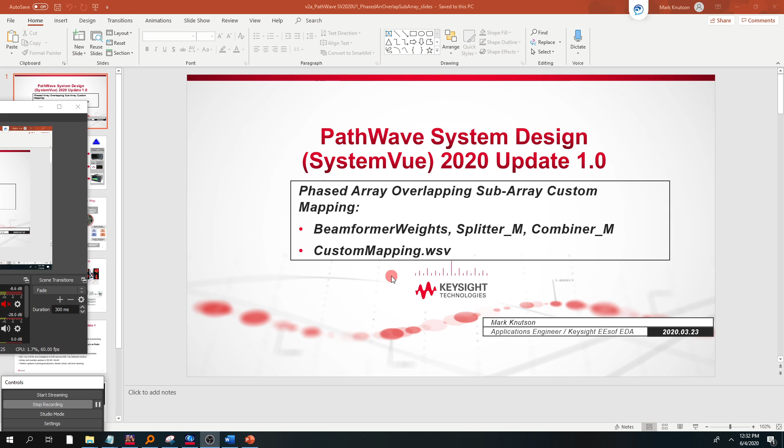This time, and this is what it looked like, I made some modifications, and I'm going to provide that example. It's called MK2 custom mapping. So let's take a look at that.

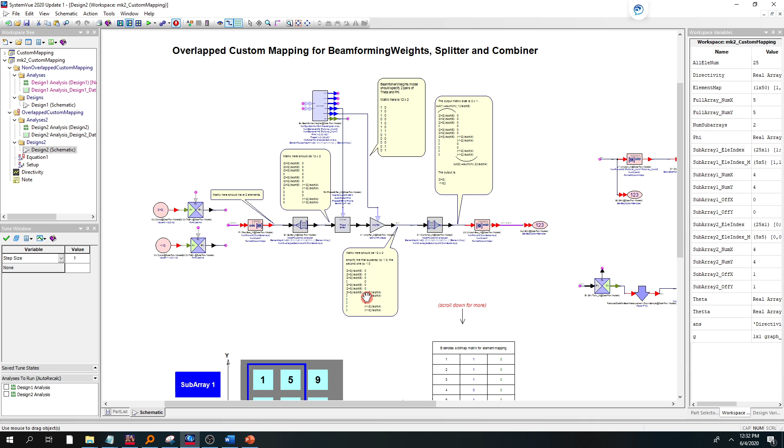So it's basically the same design, but let me show you what's different. Number one, the stock example was two subarrays that were 4x3 subarrays, set in the setup equation. I commented that out and refashioned them to be two 5x5 subarrays.

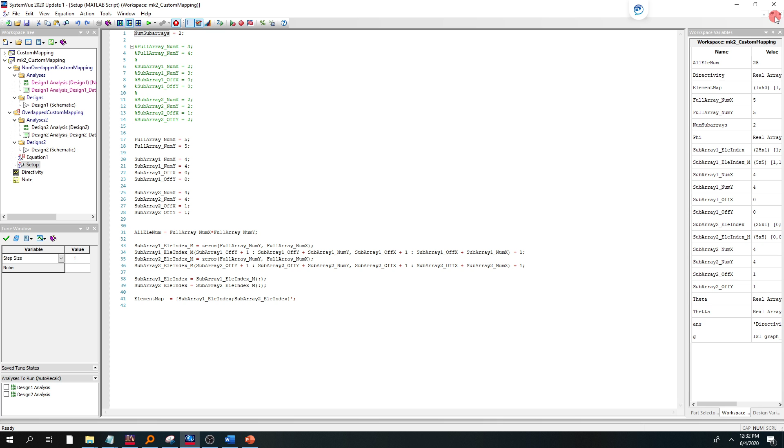We still build the element map the same way. I just changed from two 4x3s to two 5x5s. So the methodology of how that's put together visually is still the same, but instead of two 1x12s, we're going to get two 1x25 structures. So the resulting map will end up being a 1x50, as you see here, element map 1x50. And so that's a change.

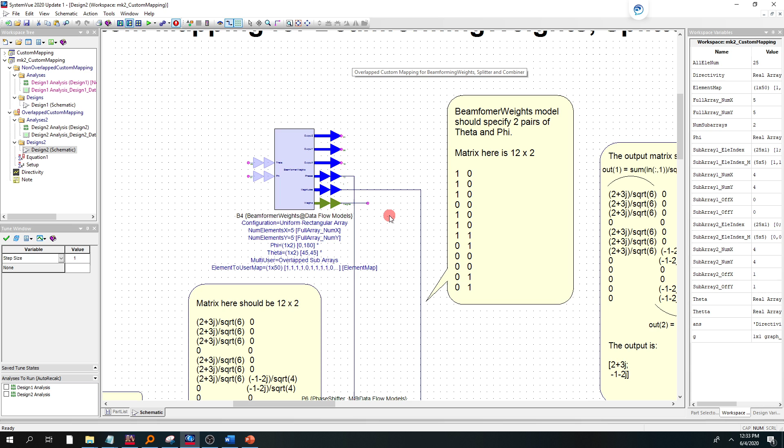The other change is I did add a phase shifter in here. I didn't have that before because I want to compare the beam directly from, again, the far field beam projected from the beamformer weights. I added a node there called weights, and you could do that on any node.

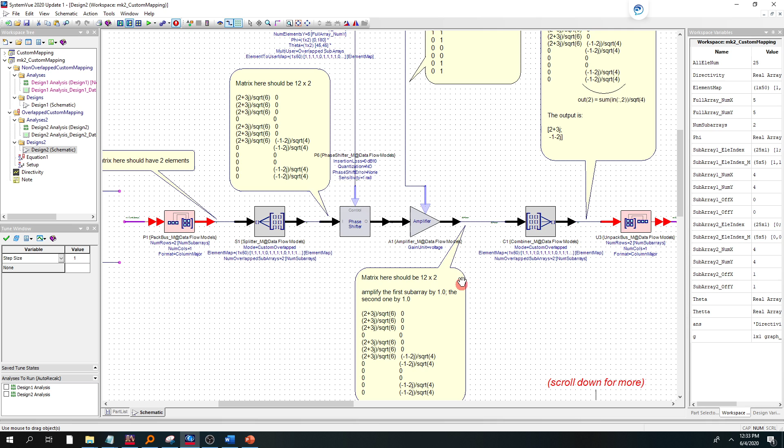You can right click and say edit net name, and you can add a node name, or you can make that a bus - I'll show you a bus in a little bit. So I added a weights node there, and I'm also going to look at the far field beam after the amplitude tapering is done, in our actual phase array design, with a node called 3D beam pattern.

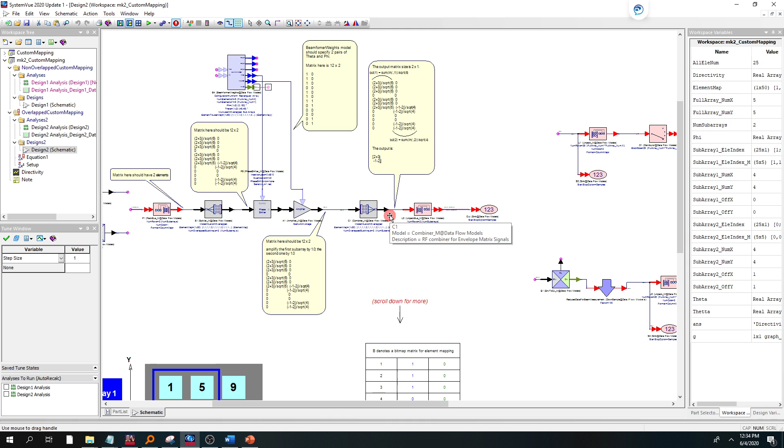So that's a change. I did change the direction. If I go to the beamformer weights, if I go to the beam configuration, I did change the directions for user 1 or user 2. So now I'm going for user 1, 45 degree theta, 0 phi, and user 2 is 45 degree theta, 180.

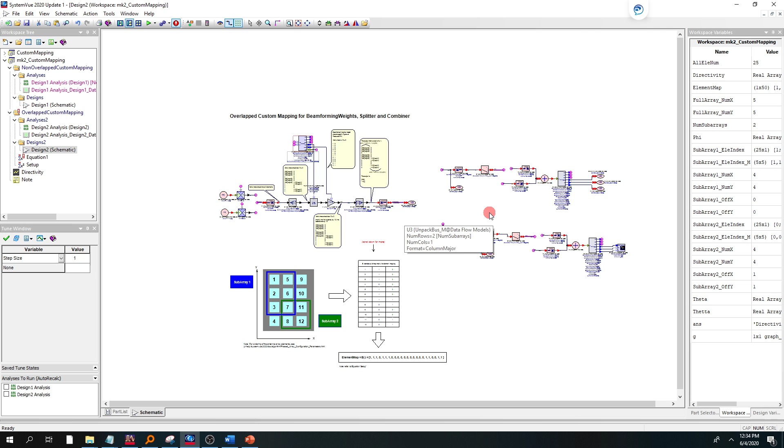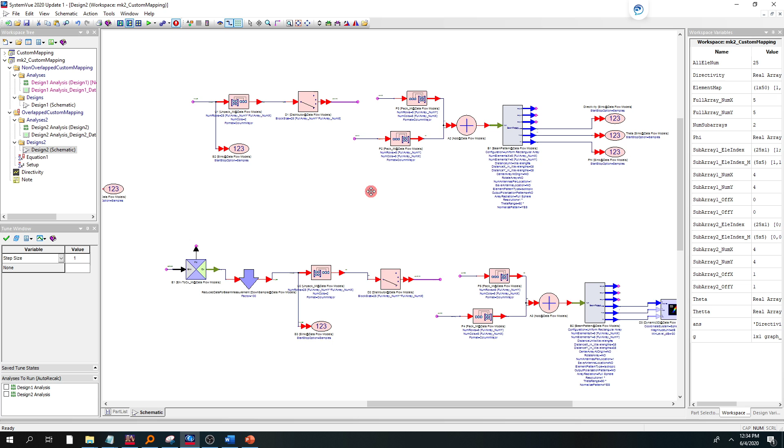So that's a change. And then to project the far field beam at those two different points, right off the beamformer weights - kind of the ideal beam that's tied electrically to the weights node - I have that on the top. On the bottom, it's basically the same thing, but I'm getting it from the 3D pattern, right from our beamformer phase array transmitter design, right after the amplifier part. So what does that give me? Let's first talk about what's common.

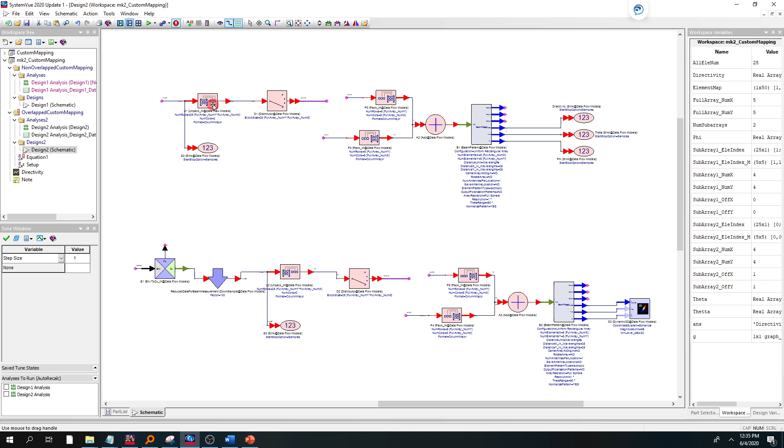There are a few differences between the two, and I'll talk about that in a sec. But what's common? On the MK2 Custom Mapping Design 2 version, I basically take the signal coming in, and I unpack it. In this case, it's two 5x5 arrays.

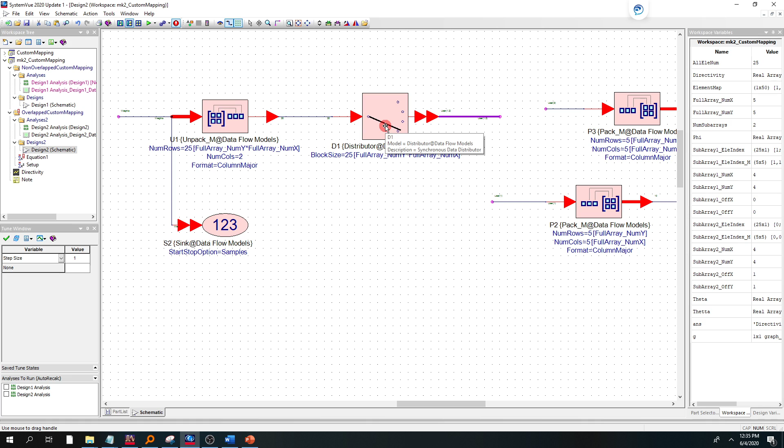So I basically unpack it in rows of 25 in column major fashion. I break it into two parts, back into the two subarray columns, and then I break that matrix into a string that I can distribute. I distribute in blocks of 25, since each block size of 25 is like a subarray because it's a 5x5 array.

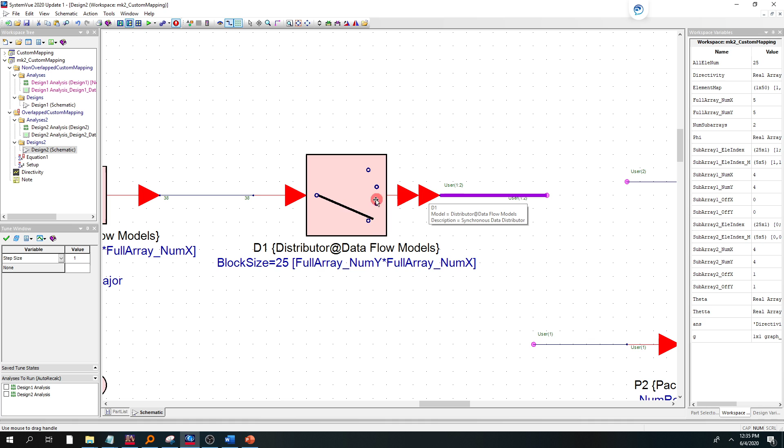So I declared a bus here. I used an unpack, and then a distributor, and at the output of the distributor it goes through two blocks of 25, distributing those out in a bus. First it goes to user 1, then after it gets through subarray 1's 25 blocks, it goes to user 2 and does subarray 2's 25 blocks.

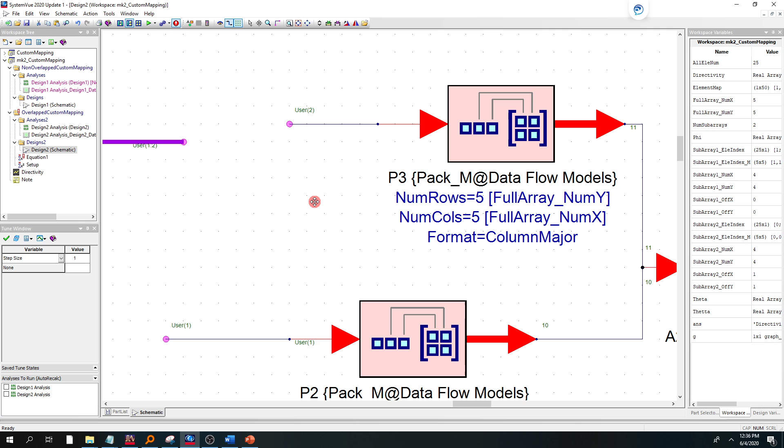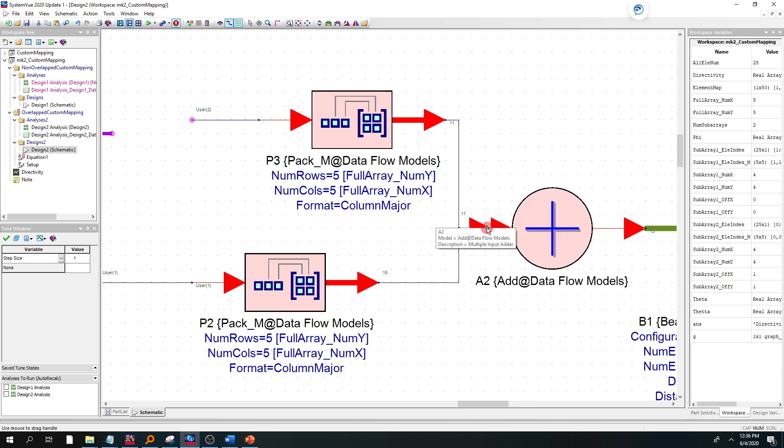And so then I use a pack matrix block. Before I used unpack, now I'm using pack to reconstitute those 5x5 matrices. And then I add them back together and put them in the beamformer part, the beam pattern part, that's going to project the far field beam. I'll show you that in a sec.

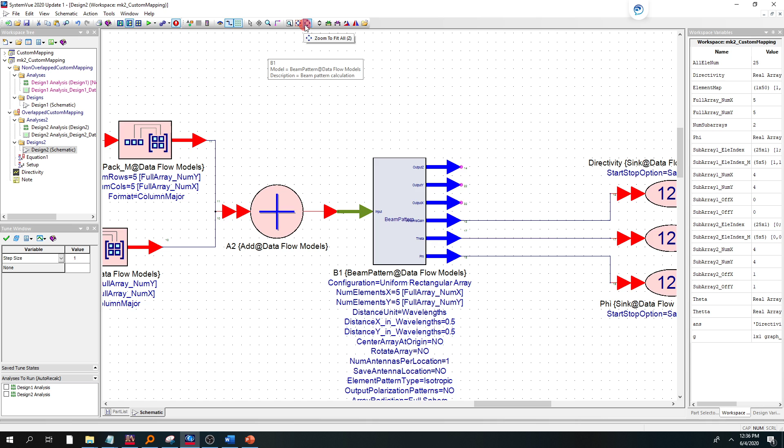So you might be asking yourself, why in the world would you unpack, distribute, repack, and then add it back together to get the same thing? Well, I could have just done the beam pattern right off of that point and gotten the results. Yes, I could.

The reason I did this is to show you the ability to turn on and off a different subarray and see the effect. This is the what-if power of a system design tool like SystemVue. So I'm going to basically show that.

These parts that I just walked through here are also in the other design where I'm picking off the actual 3D pattern node, and those are all the same. But what's different between these two?

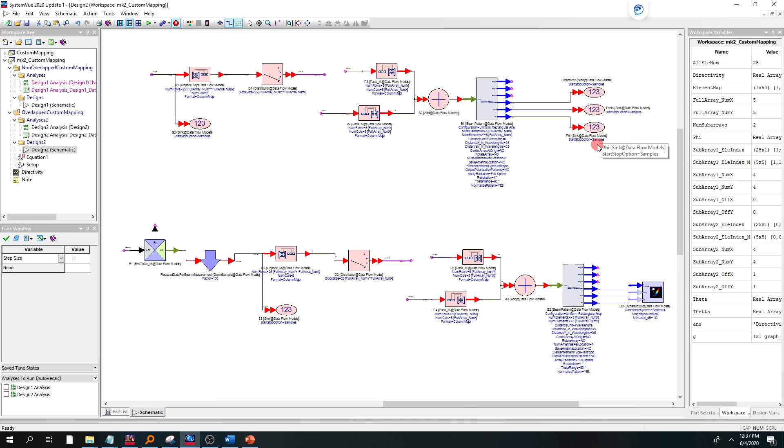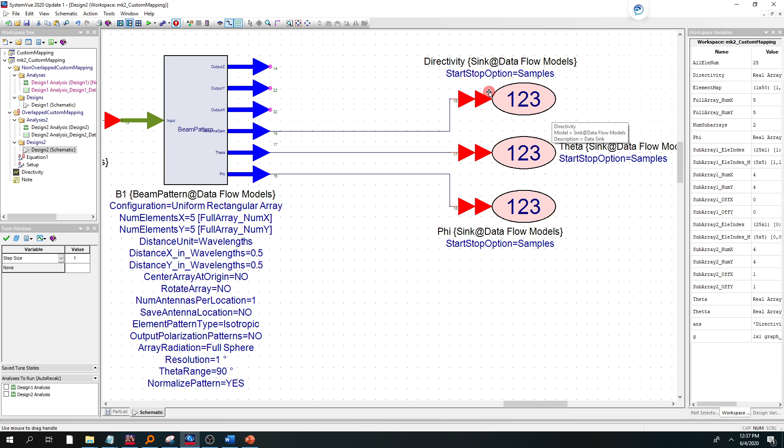On the first one, where I'm projecting the ideal beam, far field beam from the weights directly, I'm going to put data sinks on the phi, theta, directivity and capture that data. And then I'm going to do a static plot. I'll show you that in a sec.

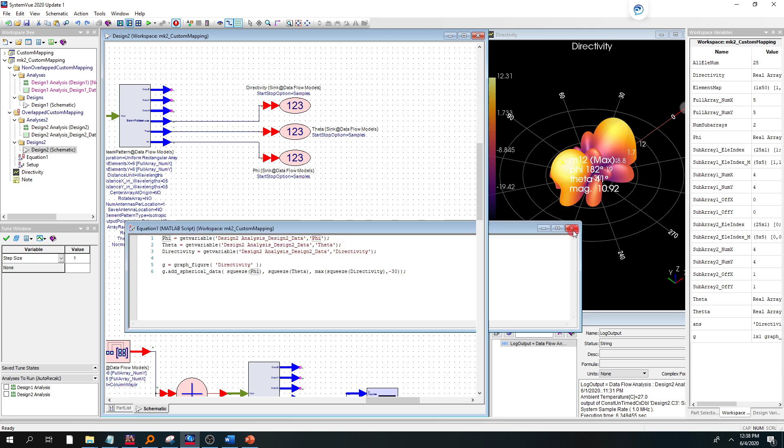I basically use a MATLAB equation to create this static plot shown here on the right. It's taking the output of those sinks, phi, theta, directivity, basically using an add spherical data, a MATLAB 3D graphical function to create this plot. And that's what I do there.

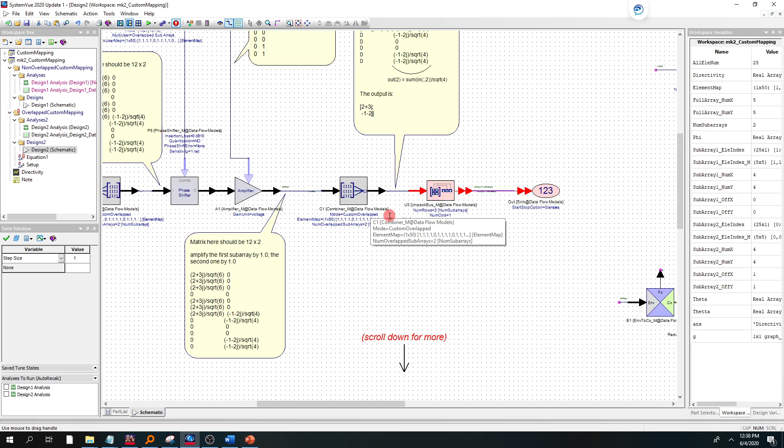So let's go back, what's the difference here? Because I'm getting data here, colors mean things in SystemVue, they mean types of data. So because I have a thick black pin here, this is a matrices because it's thick, and because it's black, it's timed envelope data. So if I want to project the far field, I need to basically convert from envelope

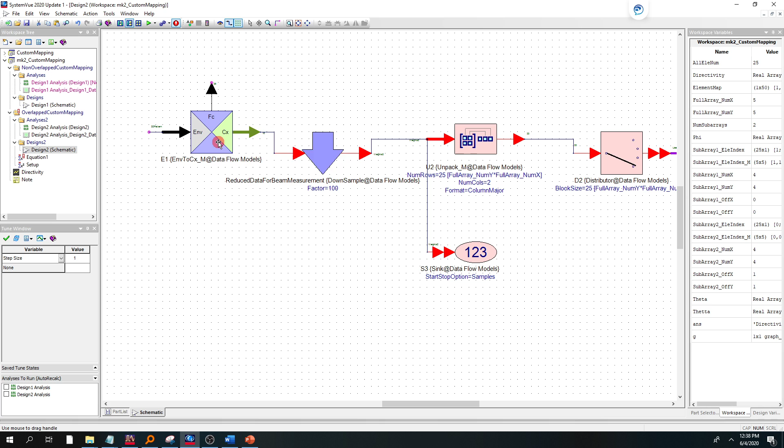to complex, and then I can use the same thing I did before with the weights. So I use an ENV to CX to convert back to complex format. And then I basically have the same things we walked through before: the unpack, the distributor, the pack, and then add it together in the beam.

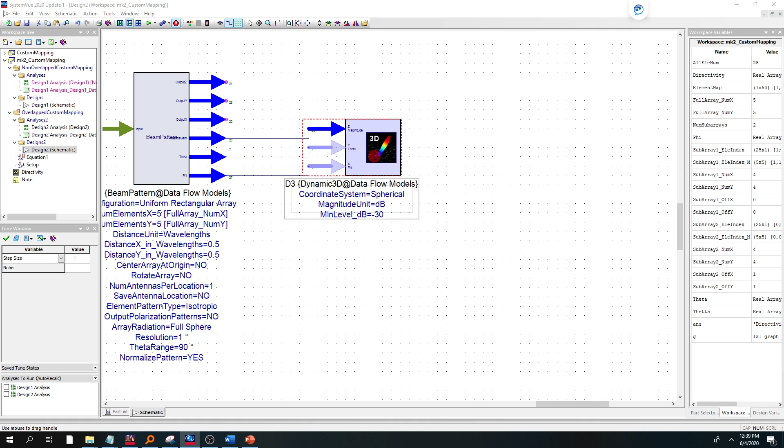Same exact thing to get the beam, but this time instead of a static plot, I added a dynamic 3D plot to get a dynamic version that basically renders. You can add markers, look at the 3D beam when the simulation's running, which is also kind of nice to do. And I set this up to do spherical coordinates, dB magnitude, and you can set a threshold which affects the colors and the dynamic range of the scaling.

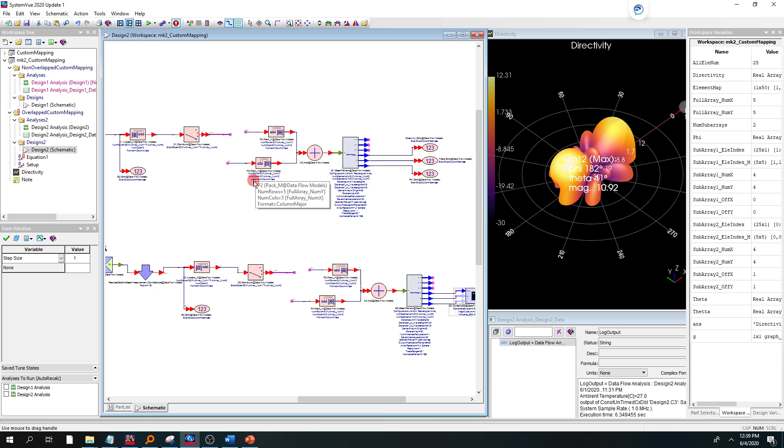So let's run this. Okay, if we run this with everything connected, I have all of subarray 1 and subarray 2 connected with the overlapping custom overlapping mapping that I set. What happens if I run it as is?

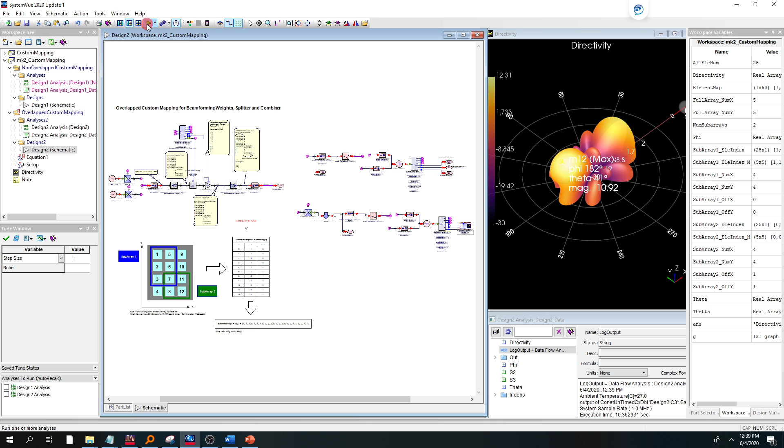It runs very fast, and I get this plot for what's coming off the beamformer weights. This is kind of the ideal beam projection, and if I run it, I get a dynamic plot from directly off of our transmitter phased array beamformer, and this is what I get here. It's a little different because we're going through the phase shifter, the amplitude tapering, but very, very consistent.

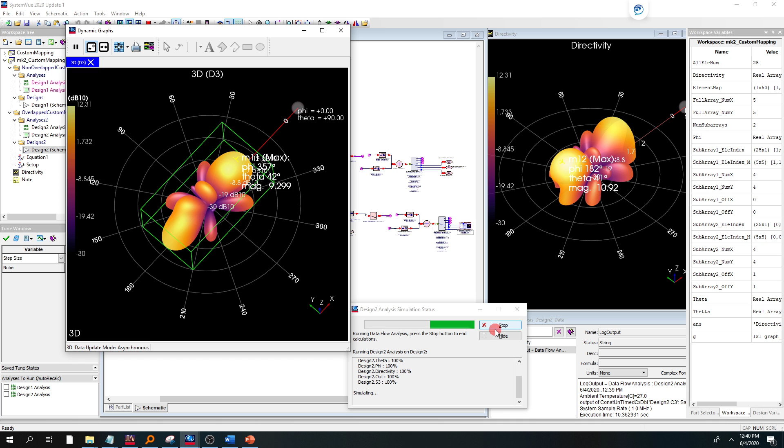And I can on any of these 3D plots, right click and add markers, I'll let you play with that. You can look at different views, you can zoom around. So let's stop that. That's the comparison between when both are on.

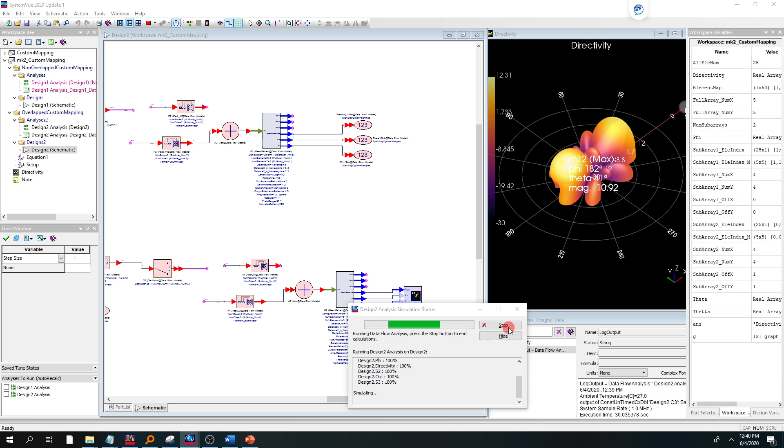Now what happens? Let's do some what-ifs here. That's the power of this tool. So if I delete the effect of one of the subarrays consistently in each, I should get consistent results, right? So if I run this, now what do I see? Now I have to run it one time to have the static plot update, and it does.

So now let's run it again and just compare the dynamic plot with it. If I put a max marker on here, you'll see that it goes to phi really 0, which is 300, 0 degrees is 360 degrees. So phi 0, theta 45, I get a magnitude of 11.52. And I get the same thing on the static plot from the weights: 0, 45, phi theta, I get 11.52. Very interesting, that's one of the directions for user 1, I think it is, that we had.

Now what happens if I do Control Z and bring back my lines, and now if I negate the effect of the other subarray just by deleting a line in this case, which I could make programmatic if I wanted to. Let's see what happens now.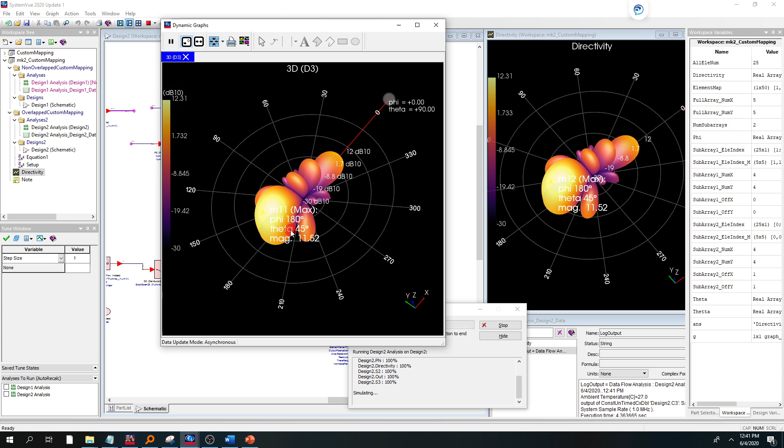So I run it, runs very fast, I stop it, it updates the plot. Let me run it again just so I can show you comparing the dynamic plot with the static plot. And once again, I get the intended other direction, right? I get 180, 45 degrees theta, and it matches exactly.

So hope you had some fun. Go off and play with that and do a lot of what-ifs and have fun with the new overlapping subarray custom mapping feature of SystemVue 2020 Update 1. Thanks.